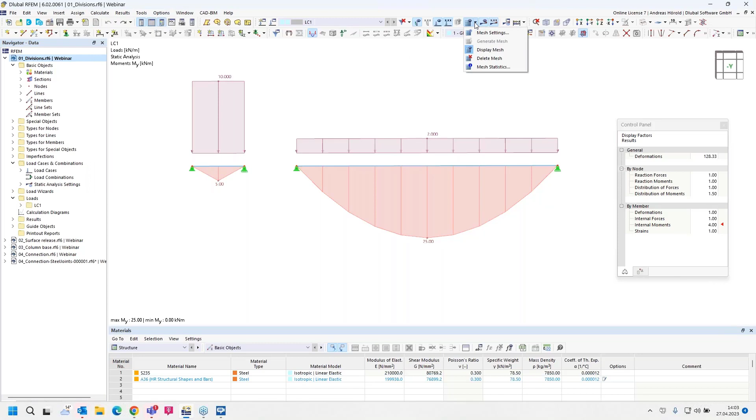How can we improve that? The first solution would be to divide the longest member further, or increase it. The second possibility is to increase the value for the member divisions in the mesh settings. The mesh settings can be found under Calculate, then Mesh Settings, or in the menu, this button here, then Mesh Settings.

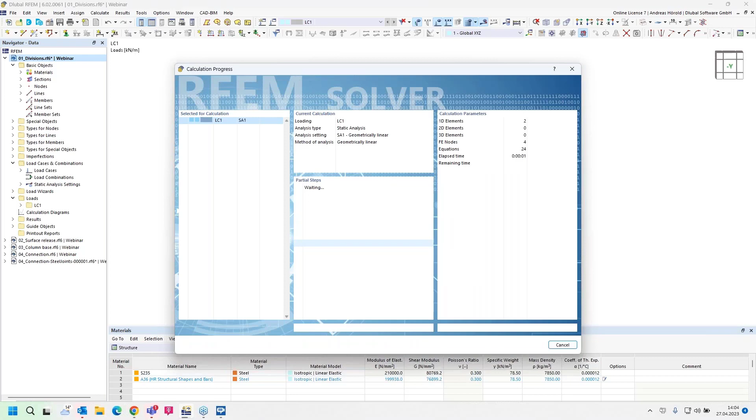For the member, the default setting for number of divisions for result diagrams is 10. If I increase that, for example, to 50, press OK, apply, and calculate all again, you can see a curve for the moment, and that display is correct. That was the solution.

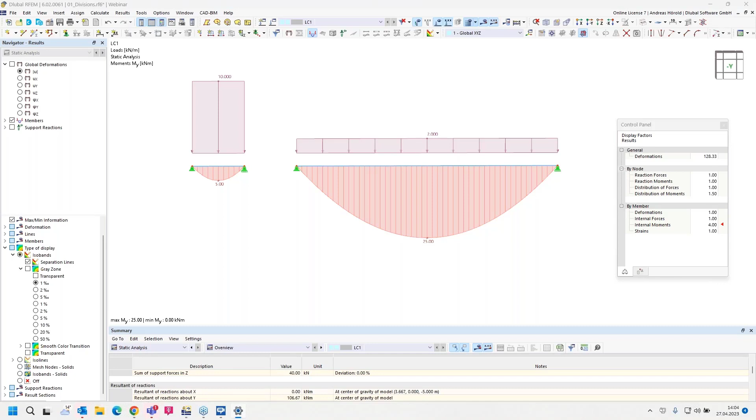Then we turn to the next question. Just a moment, I have to change the setting. Okay, so then the next model and next question.

The next question is: how can I set a contact condition between two solids? In earlier webinars, we presented special objects like the nodal release and the line releases. In this webinar, I would like to introduce the surface release. It's also possible to create surface releases, and I would like to show that in this example.

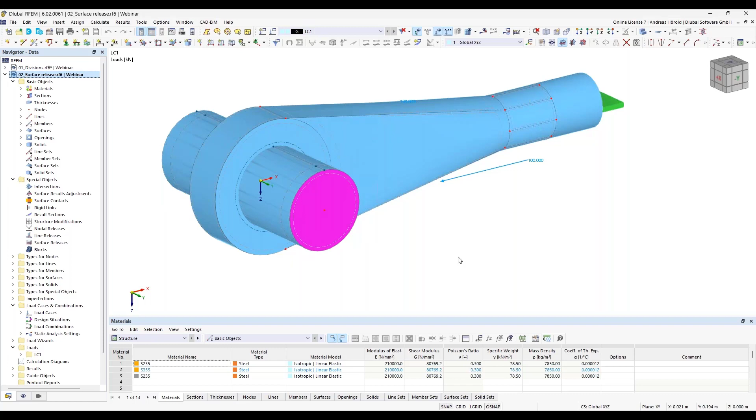This example shows a grommet with a bolt put through that place. The contact conditions in this area should be defined so that the surfaces under tension can detach from each other. So if I load the bolt here, as we defined, it should be released on that edge here. So how do we do that?

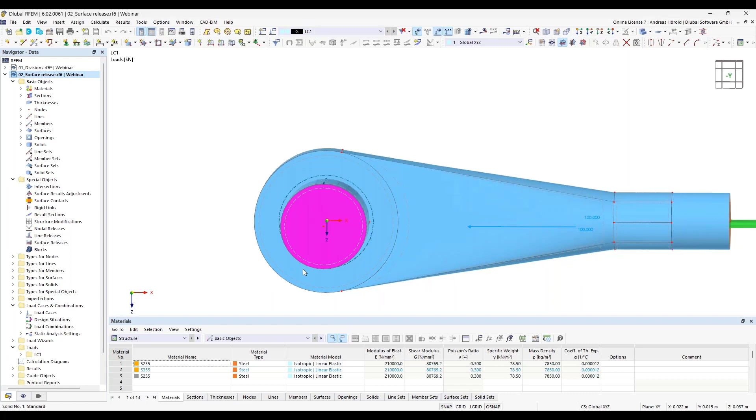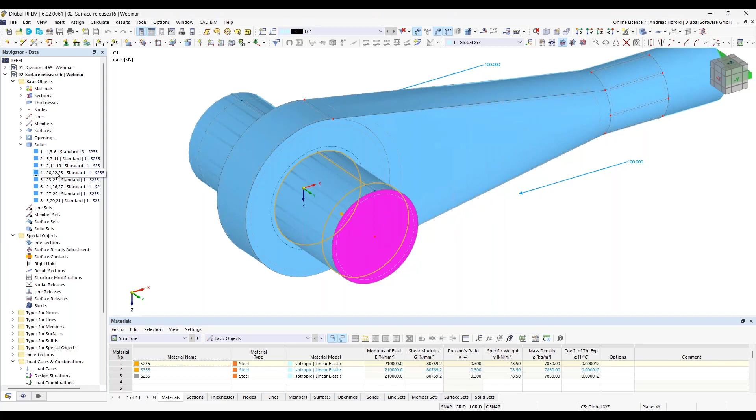Before I do that, I would like to introduce the solids here. On the left side, you can see the navigator data, and then you can see the solids: that ring, this part, and so on. Solids 4, 6, and 8 should be released from the ring here.

Okay, so then I create a new surface release. On the left side, I do a right click and then new surface release.

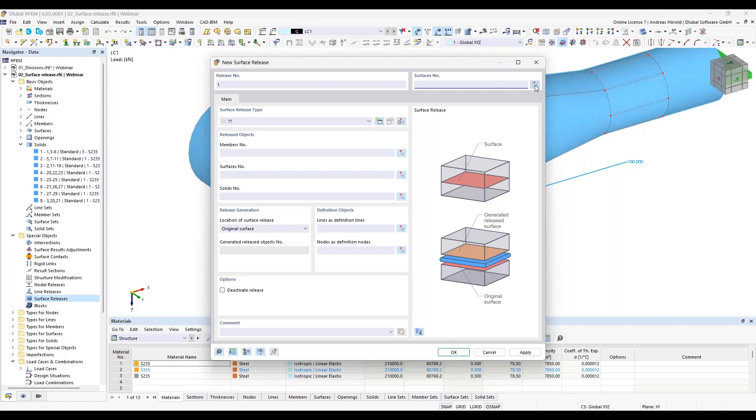At first, I assign the surface. I switch to the transparent model, and that's the surface between the two solids.

Then next, the release type should be defined. I specify a small spring for the X and Y direction, to avoid numerical problems, so that the bolt can be slipped out from the hole. In the Z direction, perpendicular to the surface, I define a nonlinearity fixed if negative pz. Okay, that's all.

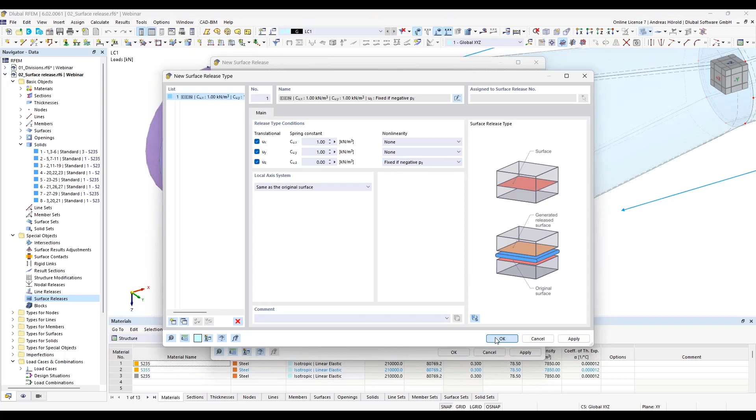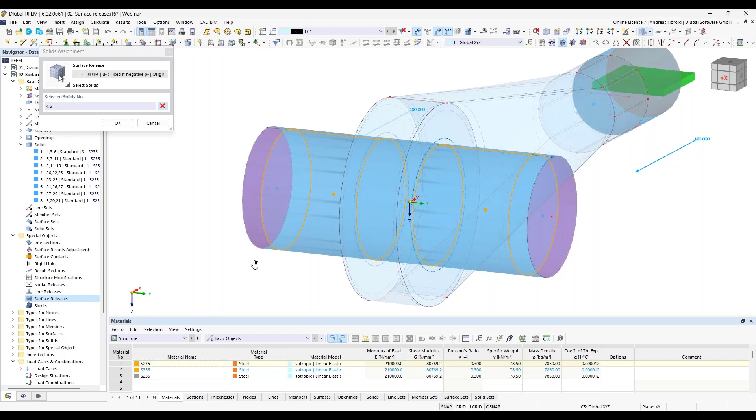So, and then I select the solids. I'd move it a little bit. Okay, so then number 6, number 4, and here I switch to the wireframe model.

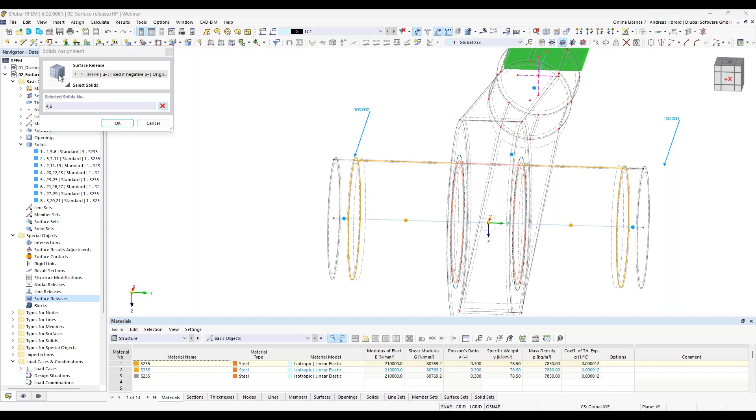One is not correct. Where are two solids who has the same center, 8 and 1. I select 8. Okay, and now I've got 4, 6, and 8. It's also possible to define it directly here, 4, 6, 8. Okay, that's all. I applied it with OK.

And after clicking OK, a note is shown informing about some missing entries, which can be corrected automatically. So, and then I select action 2. There are some surfaces that must be released. Okay.

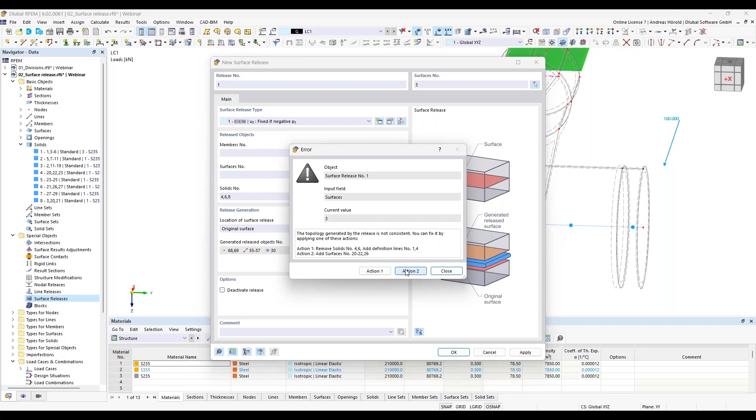So, and then all should be fixed, and I can calculate all. So that takes some seconds.

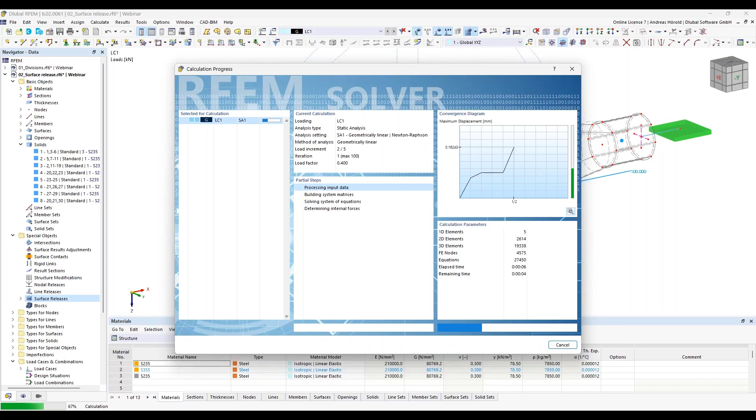And after the calculation, we can see that the solids are detached from each other. So I move, or I display in minus Y direction, and can also do an animation. And you can see that the bolt is released from the ring.

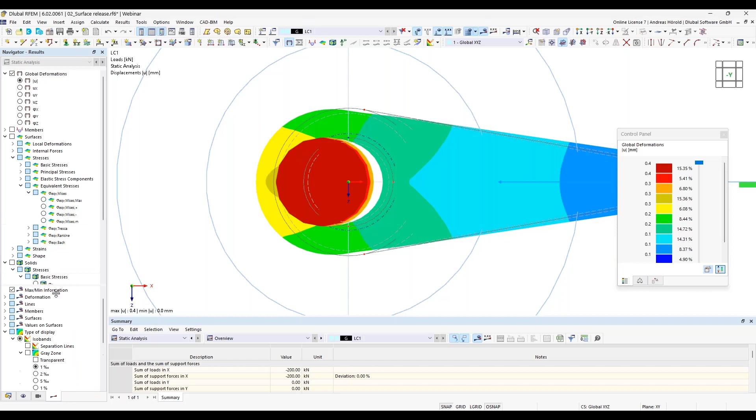We can also check the results for the solid. So solid sigma x, yeah, in that direction here. You can see there are only compression on that side and also on that side and no tension.

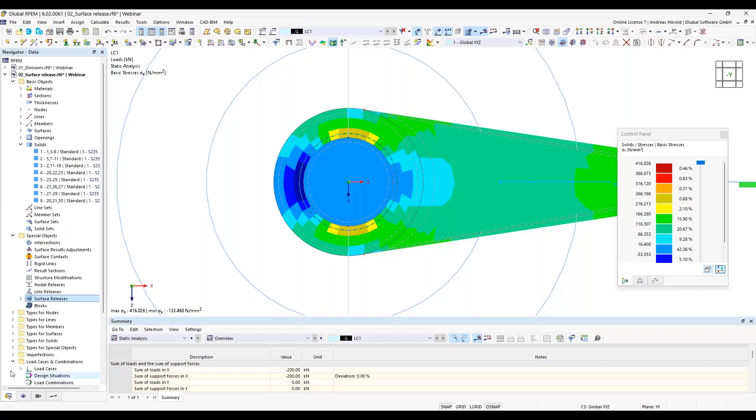Yeah, and that's because the bolt is released from the ring. Okay, that should be all to that question. I turn back to the first model.

And the next question is, unfortunately, I'm not able to move my model by the mouse. Also shifting a node to another grid point does not work anymore. How can I reactivate it?

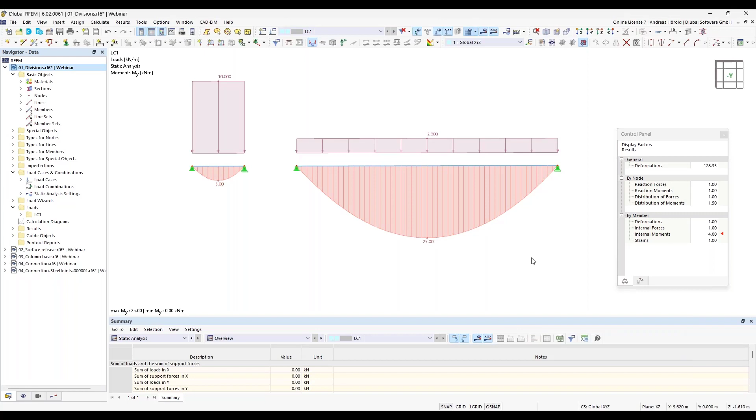Okay, what I mean is that I can't move or copy also by drag and drop. And the reason is, or you can reactivate it by a right click and then activate the drag and drop function again. Maybe that was by accident activated or deactivated, and now we activate it again.

And then I can move the node. I move the node, for example, or I can copy that by drag and drop, and so on. Okay, that should be all to that question.

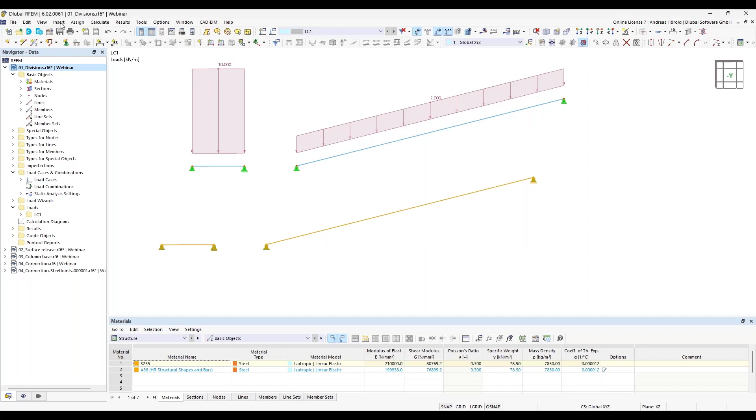We work with that model for the next question. And next question is, how can I change a cross section taken from the library concerning its dimensions to a specific value? So let's create a new section.

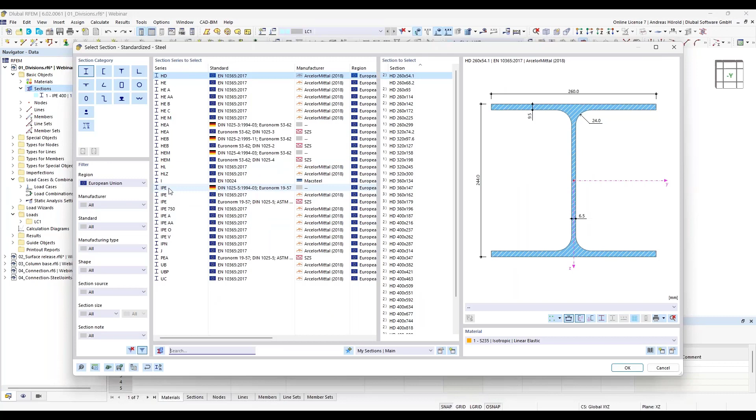I go in the navigator data for the section, and then I select new section. And I can, for example, choose a section IPE, for example, 300. Okay.

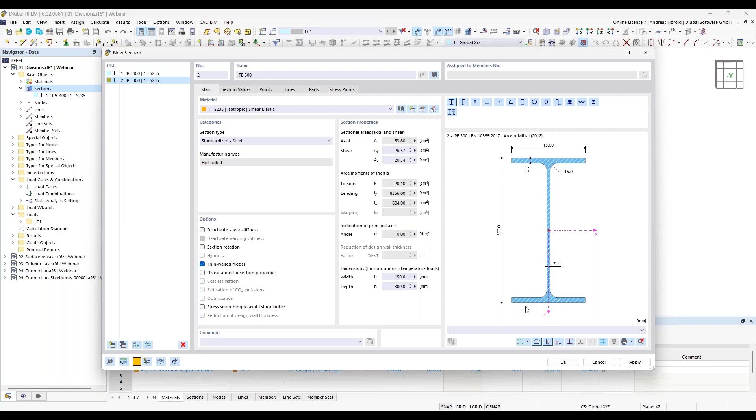So, and at the moment, the section type is standardized steel. And if I want to modify the thickness of the web or flange, or the height, or maybe you have got an older cross section that is not standardized anymore, or you have got a rusting for the web or for the lower flange, and you would like to modify the cross section, then you have to change the section type to parametric thin wall.

So then you can go to the next dialog and change the dimensions. For example, because of rusting, you've got a web only with a thickness of 5 millimeters, or it was changed, or you have got a rusting of 2 millimeters on the lower flange.

If you have got it on the upper and lower flange, then you can change it here, or you can also change the type. If you have got different flanges, for example, you can select such a single symmetric section.

And if you want to have got a rusting on the upper and lower side, for example, of 2 millimeters, then I would like to select 8.7.

And then I have to modify the 300 to 296. Okay, so that's one possibility.

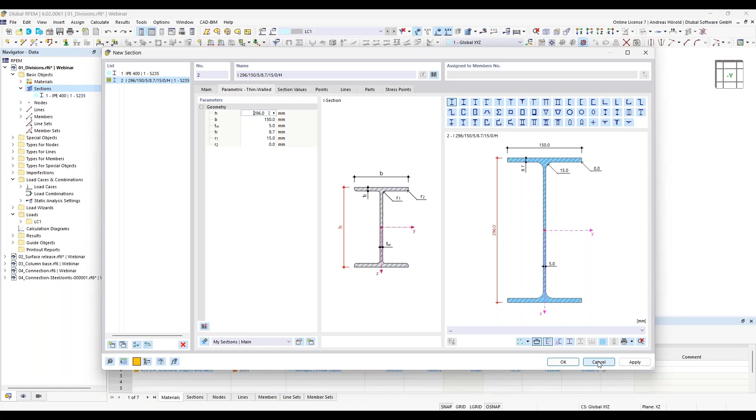And the other possibility, of course, is to use RSECTION, the single or the standalone program, and then you can use that RSECTION cross-section in the RFEM or RSTAB model.

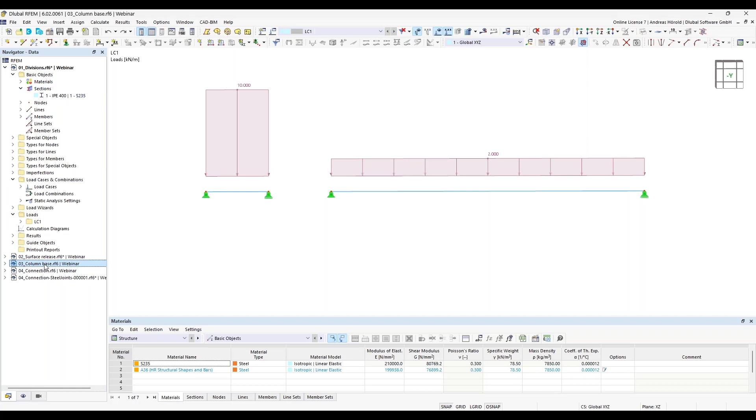Okay, so then we turn to the next model and the next question. The next question is, I would like to hide my surface results for a certain area around the zero value. Is there any elegant solution for this in RFEM 6?

If only individual areas in a model are decisive for the design, the evaluation based on isobands may quickly become confusing. You can avoid that with this function here in the navigator results, then type of display, isobands, and you can check the gray zones.

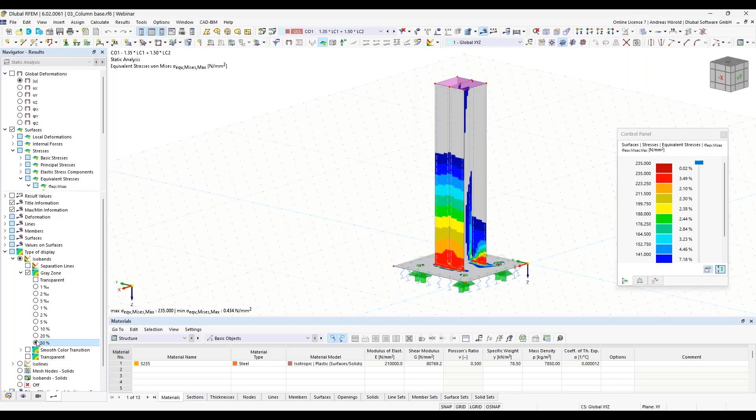Below the item, you can select a value between 0.1% and 50% to be covered by the grey area. It's only 0.1%, 1 promille, 1%, and so on. Yeah, I think a good display solution. Okay.

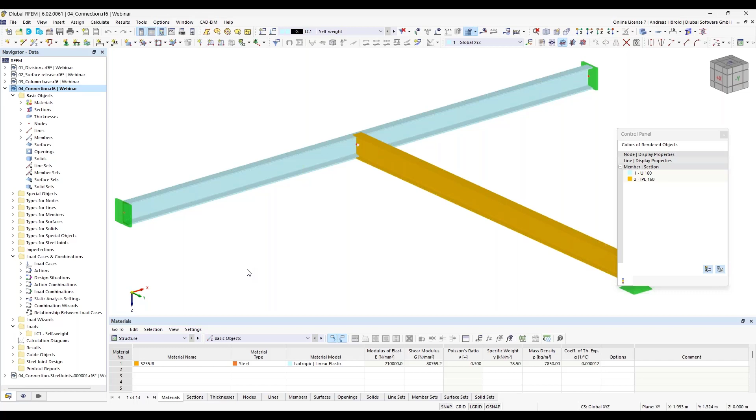Then we turn to the next question and the next model. The next question is, how can I connect as fast as possible a beam to another beam by a thin plate using the steel joints add-on?

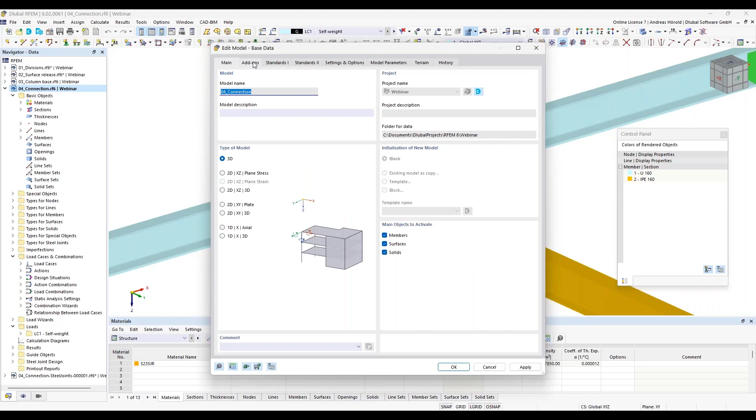Yeah, that's quite easy. First, I have to activate the steel joints add-on in the base data. Left above, go to the base data, and it's necessary to select or activate the steel joints add-on.

And then under standards, you have to choose the standard and the national annex. I leave the standard CEN national annex of the Eurocode 3. Okay.

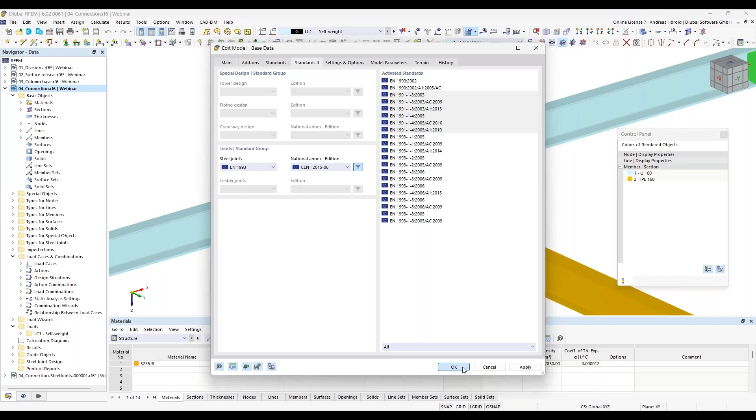So then the type for steel joints is activated, and I can create a new joint by right-click, new steel joint.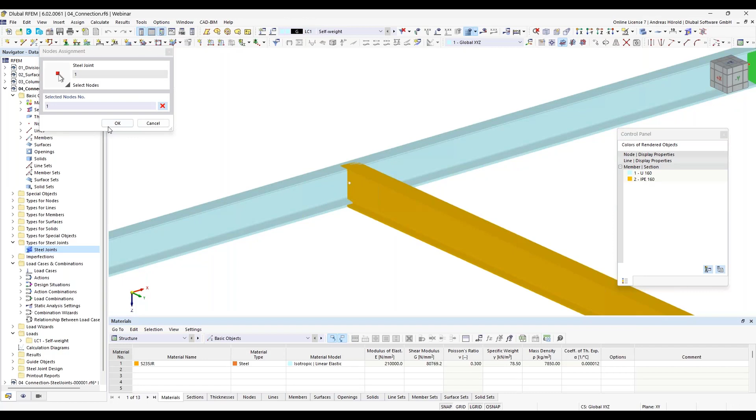So, in the main table, you can define the node to be designed. Okay, now all members, all 3 members, are selected now. Now we need all the members.

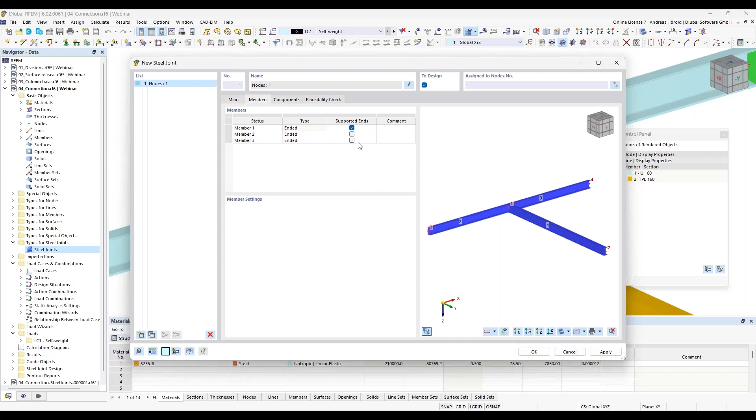And I can select the next step. I have to define the supported ends. I define as supported ends the end of member 2 and member 3, and member 2 and member 3 are continuous members.

So that should be all. You can also define the material. I use the material that is already defined in RFEM 6, and also the section.

So, then in the components tab, we find all specification for the joint type.

And with the insert components from library button, we can choose from various pre-fabricated categories. Now we've got the rigid connections here, the pinned, the truss, and the bracing.

Okay, we would like to use a pinned connection, and you can see the beam to beam connections, beam to column, beam to continuous beam, column to beam, and cross joint. We select the category beam to beam.

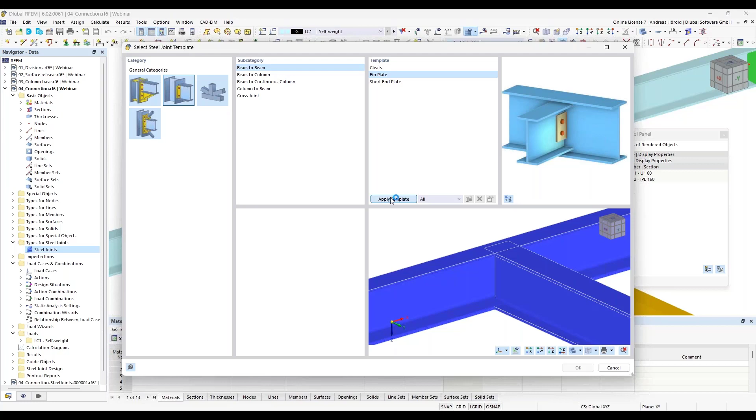Now we want to use the fin plate, but the cleat, also short end plate, is available. So, if I apply the template, you can see a preview here. Okay, that looks quite good, and I can apply that with OK.

So then we can see also the preview here, and we can define the single parameters here. Member 1 is the connected member, then the reference member, or reference members in that case, are the member number 2 and number 3.

That's already correct. Then the connected member end is parallel, that's okay. And the connected member offset should be more than 10 millimeters. I select 70 millimeters, and you can see there's no collision or overlapping anymore.

Material for the plate is okay. We use the same material, the S235JR. Then the thickness is 10, okay.

Alignment, connected member, that's also okay. The position, you can change that from front to rear, if you want.

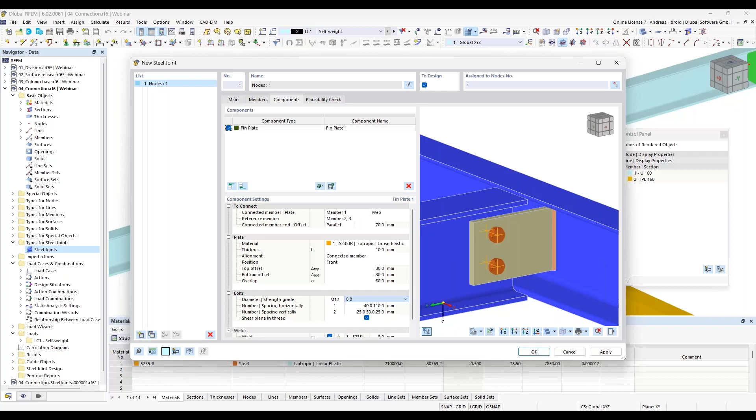So that's okay. Then I have to select the diameter between M12 and M36. All diameters are available. I now select M12 and as the strength grade 8.8. Then you can define the number of bolts.

How many rows, for example 3, 2, and I select 1 row. As spacing, 40, and the other spacing is calculated automatically. The same is for the spacing vertically. I select 25, and the rest is calculated automatically as well.

Then you can use or consider that the bolt and the shear plane is in thread. I deactivate it in that case. And for the weld, I leave the 3 millimeters weld.

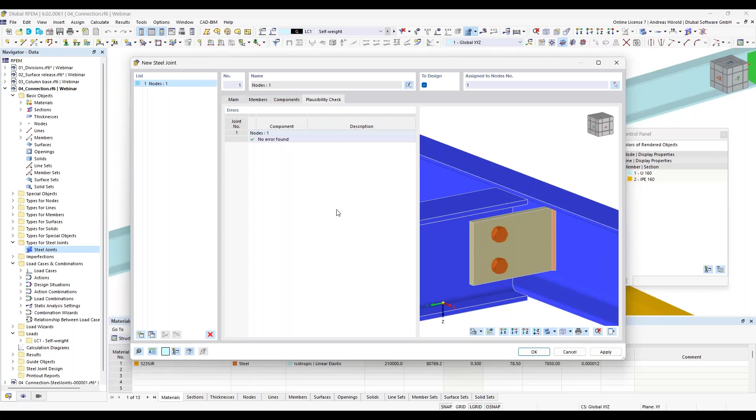Okay, then you can go to the plausibility check if all is okay. It's all okay now, no error is found, and I can leave the dialog.

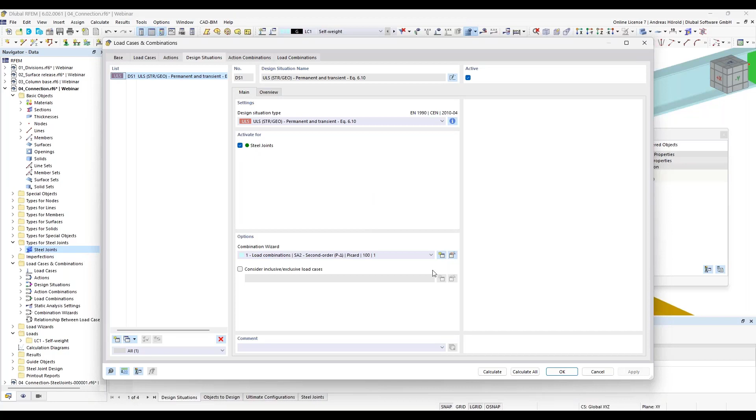And then in the table, I can turn to the steel joint design. I can, for example, double click on the ultimate limit state design situation, so I can check if the steel joints add-on is activated. That's the case, and that's the case. Okay, that should be all. Only one node, objects to design, and I can run the calculation.

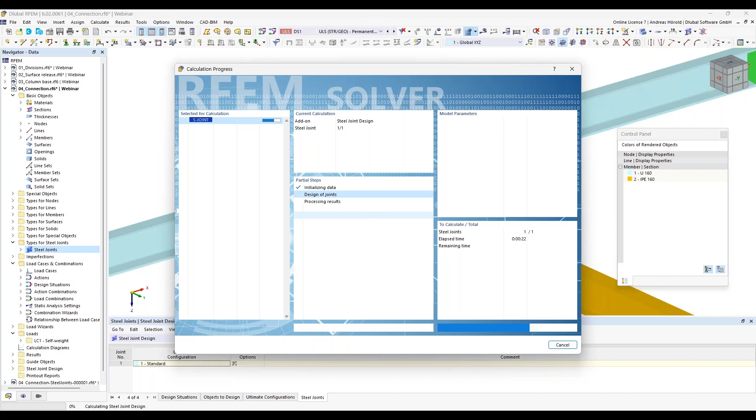That should take a short moment. So in the background, there's a submodel created, and the members are then surfaces in the area of the connection. I can show that later. The submodel is why the calculation takes some time, but I think it's not too long.

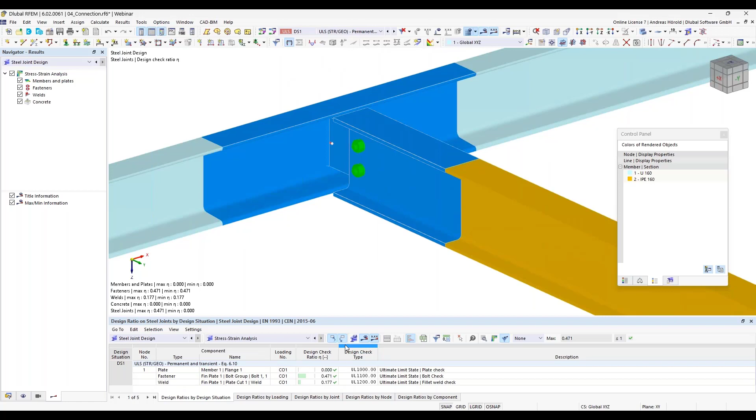Okay, you can see the design ratios in the table. And if I, for example, double click on that line here, or I can go to that button here, design check details - there are two possibilities - then I can see the design details with the single design checks.

Here on the right side, you can see the formulas or equations from the standard, and you can see from which standard and which tab or which part the formula is. That's the design for the fasteners, that's for the plate, and that's the design for the weld.

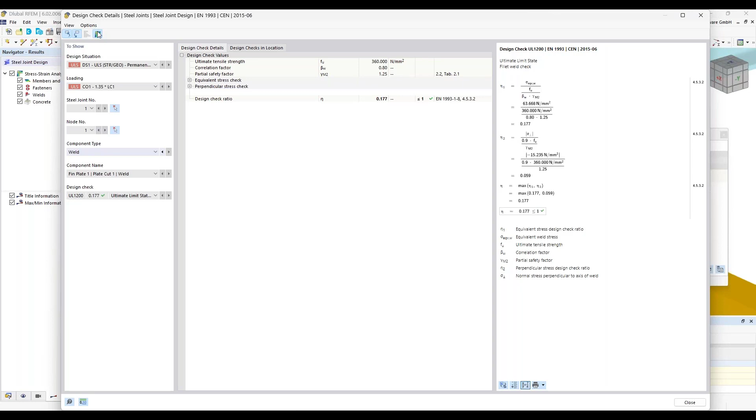So, when clicking here left above the colored joint icon, you can also display the results of the joint model. Now you can deactivate some parts if you only want to see the bolts and so on. And if you click on the button on the left side, at the top and at the bottom, you can save a steel joint model.

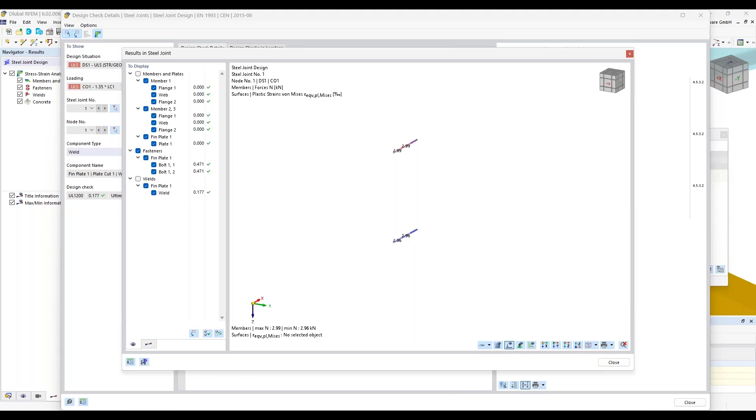I already did that and would like to show you that model. So, that's the detailed model with all the results. I disable the results so that you can see the model, and you can see the different objects, for example surface contacts, rigid links for the welds, and so on. That's the model from the background, that's calculated in the background, and you can see the results in the original model.

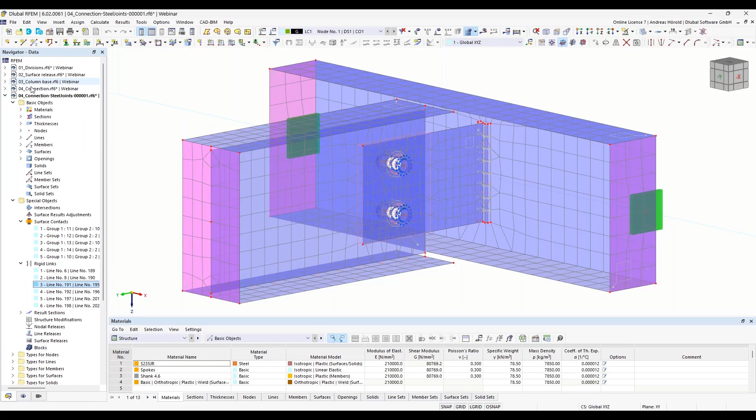And now I will turn back to the original model. Just a moment. Okay, that should be all from my side. And I hand over the screen to Yasmin.

Thank you, Andreas. I will take over again.